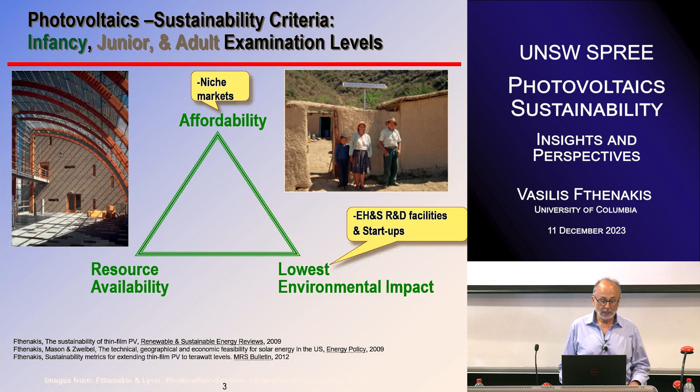The work started at Brookhaven National Lab in the mid-80s, and under the auspice of the Department of Energy, we were looking to help, for the most part, environmental health and safety in startups and laboratories. So to help them to maintain safe facilities, safe labs, safe startups. And the cost issue was not really a major one, because the markets were niche markets. We were taking off-the-grid small systems in developing countries, and some architectural designs, statement type of designs like the ECN in the Netherlands.

Following up in perhaps 1998 to 2005, I call it a junior stage, when big markets started with incentives, subsidies in Japan, then in Germany with RPS, early 2000, then the big and profitable markets started, and the cost issue had to do with competition in peak shaving markets. And as you know, peak electricity is more expensive than base electricity. So photovoltaics didn't have to get to very, very low prices to be competitive for peak shaving markets.

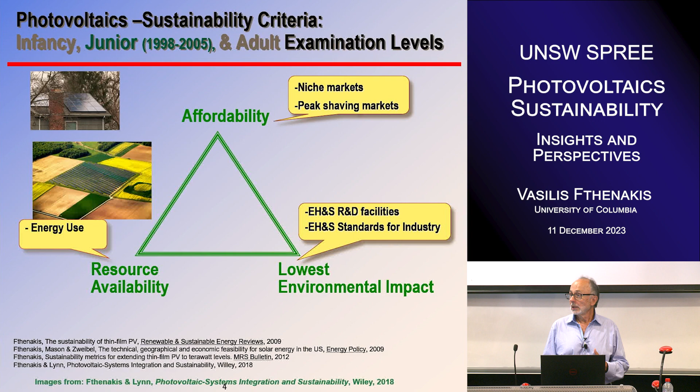For environmental impact, we were working with others and organizations, the DOE and NSF and so on, to develop standards for the industry, how to maintain environmentally friendly facilities. And then we reached what I call the adult stage, where we are now. It's the longest stage, where the affordability issue became affordability in a competitive world. Prices that are lower than the prices of electricity from coal, natural gas, and nuclear, and so on.

The life cycle impacts included investigations of the potential impact of big solar farms on the ground. And material availability became a real issue. Because for some technologies, you have minor elements from the production of base elements, like tellurium from the production of copper, indium from the production of zinc, and you have silver and so on. And those are finite resources with relatively low production in those years.

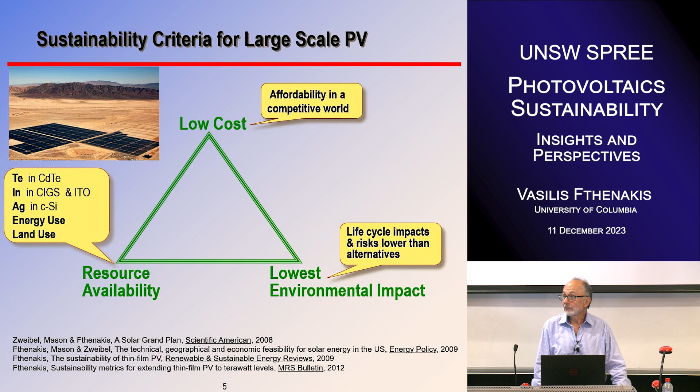Also, we started looking more intensely at energy use, to answer questions about energy return on energy investment, and land use. Now, the cost issue has actually been addressed.

As you know, solar electricity, at least from utility-size plants, is the least expensive electricity now. Solar and wind. In the United States, for new plants, solar plants are actually the least expensive ones, starting from 2021 even less expensive than wind for any new plants.

And they priced down now to about $35 per megawatt hour. That is almost as low as the price of electricity from fully depreciated nuclear and coal power plants, and a lot cheaper than new plants with any fossil and nuclear. So the cost issue has been addressed already.

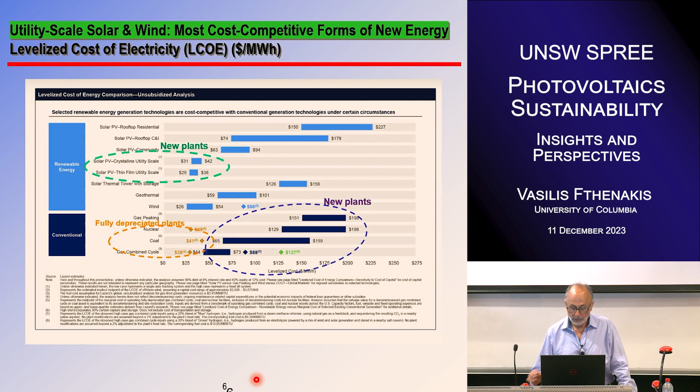Now, what about other issues that have to do with resources and environmental impact? There are questions there. Some actually reflect real issues. A lot reflect perceptions, like photovoltaic power plants can pollute the environment. That PV growth is constrained by material availability, that's a real issue. I'm going to discuss that.

Energy return on energy investment is too low. That's a perception for some; it's not an issue. That PV deployment uses too much land, again, a perception, depending on how you look at it. And that photovoltaic power plants create a heat island effect, a real issue that we investigated. So let's start with some of the perceptions, perhaps.

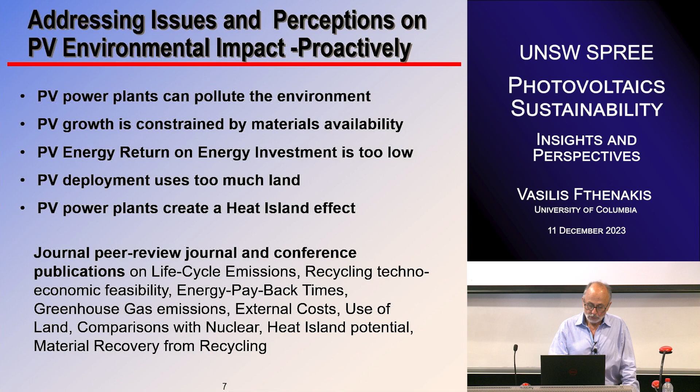Over the years, we developed a bibliography with many journal publications, conference presentations and publications, and magazine publications, trying to proactively answer all these questions. So we took the extra step, as scientists should do, to disseminate as effectively and as broadly as we could the results of our research. High impact journals, but also magazines and even newspapers, and a lot of interviews those years.

Actually, I think a leading study that combined the three metrics, the resources and impact and cost, was published in Scientific American in 2008 and was translated into 8 languages. So everything has been fine. And now currently, photovoltaics, as we know, lead the energy transition. It's the least expensive new energy generation, at least in some areas.

But still, there is a debate. You couldn't imagine that. What you see here is an article that was published late in 2021 in Energies, where the authors Seibert and Rees contested the inherent nature of photovoltaics as being renewable. I don't know if you can read some of these words. They call solar so-called renewable energy. The espoused technologies are not renewable, they were claiming.

From mining to installation is fossil energy intensive. Producing them, particularly mining their metals and discarding their waste, entails egregious social injustices and significant ecological degradation. And they had about 70 citations, most irrelevant, but they also cited a few anti-solar articles in the literature. Now, this obviously was erroneous, and we had to address it.

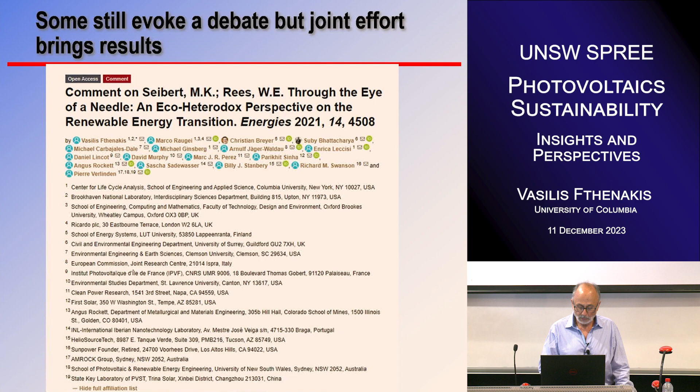Now, this quick and dynamic response had lasting effects. The editor-in-chief apologized for accepting the original manuscript in the first place, and I think we had some lasting effects because they put some additional safeguards in the peer review. Essentially, we chastised the journal for having inadequate peer review, and they admitted it, and they put safeguards there.

Now, some real problems and real solutions. Supply for minor elements like tellurium, indium, germanium, gallium, silver. We feel that there are different solutions. For tellurium, for example, the supply can increase. I will give you a few highlights of what I believe is the case there.

For indium and silver, the demand can be reduced. I don't think the supply can increase a lot there because there are very mature production markets there. And as you know, silver can also be displaced with copper and aluminum. So let me give you highlights of the stories.

We don't know much about tellurium production. We don't know exactly what tellurium production is today. I think it's between 600 and 800 metric tons per year. But we know a lot about copper production. Copper has been followed for many years, and we know that there's about a 3% increase in the primary production of copper over the years, with a little break during the COVID years.

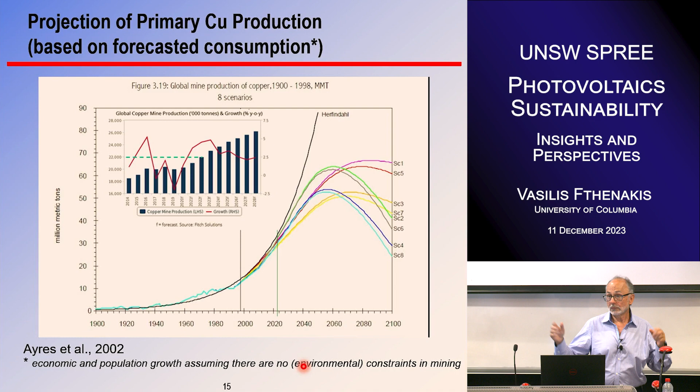Now, tellurium is a byproduct of copper production. Most of what we have now in the market is from copper sulfide ores, a byproduct of copper production. So we feel that it's going to follow the same trend, really. So let's see how it's produced in copper circuits. Down here it is produced as a byproduct from the refining of copper with anode slimes. So we get about 50% of the tellurium that is in those slimes. So from 100 tons in the slimes, we get about 50.

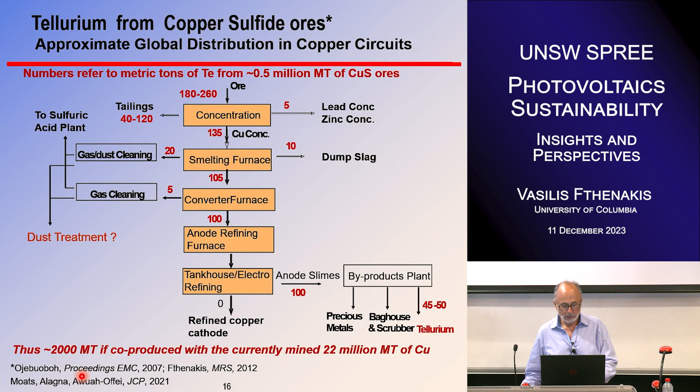We have other losses in the air pollution control equipment that could perhaps be recovered and so on. But even without this additional recovery, with 50% recovery at the end, if all the production of copper co-produces tellurium, we can have 2,000 metric tons. But maybe less than half of this can do that, because copper oxide does not really include the tellurium, copper sulfide does. But anyway, I think that now we are about 600 to 800 metric tons.

And again, following the scenarios of copper production that I showed before, we expect a peak at about 2060, 2070. I have bracketed this in low and high, depending on the scenarios and also on assumptions about increased recovery from anode slimes. Selenium is recovered by about 80%, and gold and platinum about 95 to 98%. So the 45 to 50% recovery rate could increase. But anyway, we're going to have a peak at this point unless we recycle.

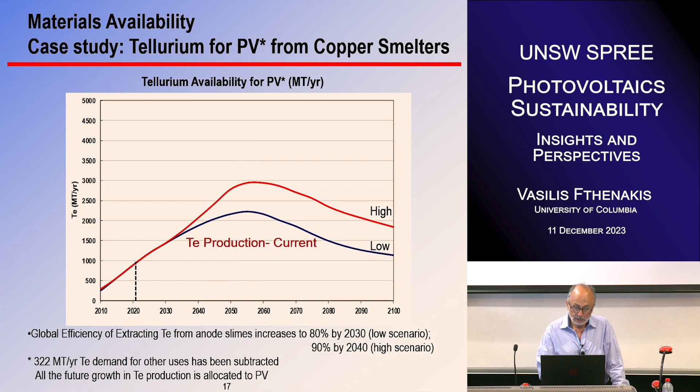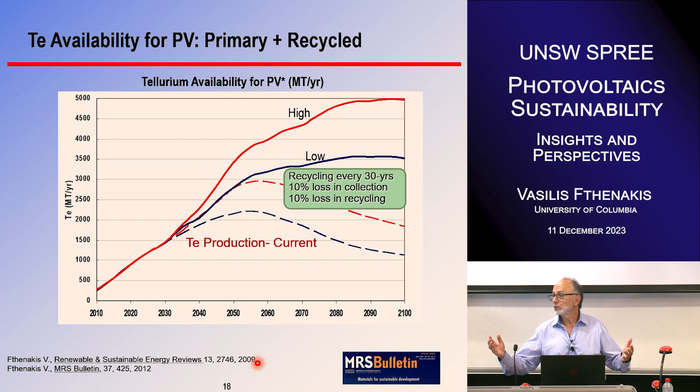With recycling, you can have a very important secondary resource of tellurium in this case. And it is proven, you can recover it. There is technology. A major company in this production for solar recycles their scrap and so on, and you can have 95% recovery of tellurium there at commercial scales. So then the peak is shifted to the next century. By then we may have fusion, or so many other technologies that we don't need tellurium any longer.

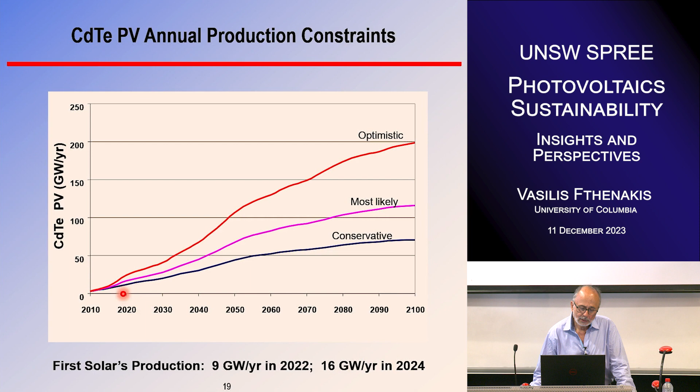With these primary and secondary resources giving perhaps a high ceiling on the production of cadmium telluride, we can make these projections. Again, optimistic, most likely, conservative, corresponding to different efficiency and film thickness assumptions according to different scenarios of production. I think the only big company in the world that produces cadmium telluride is close to 16 gigawatts now, with new production of about 7 gigawatts in India. So we're along the conservative one, but not far from what we projected about 10 years ago.

Now, the value of recycling becomes apparent here, because with recycling you have a secondary resource of tellurium. The same applies to other elements from other products, indium, germanium and so on. You increase the availability and the potential of these technologies, and a secondary resource also relieves the pressure on prices. It addresses the cost, and it avoids disposal in landfills. So it improves the environmental impact. And you also save energy in addition to saving materials, which also reduces the environmental impact.

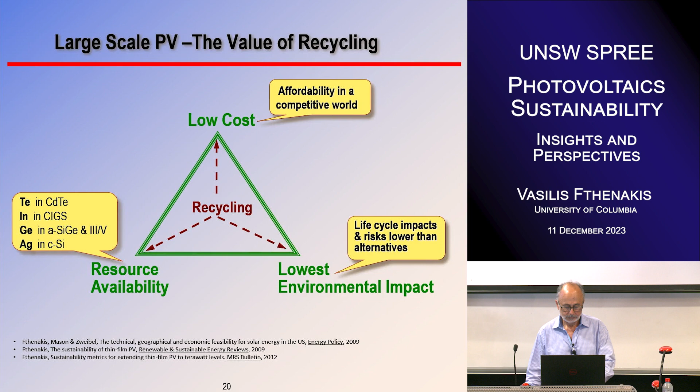Okay, so recycling technology, again, it is developed. You can see here a schematic of technology we developed at Brookhaven National Lab several years ago, starting with module fragments in the hydrometallurgical operation, using something inexpensive, dilute sulfuric acid, in this case only about 0.5 to 0.7 molar, and peroxide. Then we leach the metals and the semiconductor elements.

We leave glass that we still need to make cleaner to get it back into float glass. And this is a project actually that I'm working on now. We started working with Pablo Dias companies from UNSW, who actually originated the technology, to have clean glass going back into float glass or rolled glass for silicon modules.

But here the leachate that includes the metals and semiconductor goes through a series of ion exchange columns. The first will retain copper, the second will retain cadmium. At the end you have a leachate rich in tellurium, which precipitates as tellurium dioxide. You rinse the ion exchange columns and you get copper from the first, cadmium from the second.

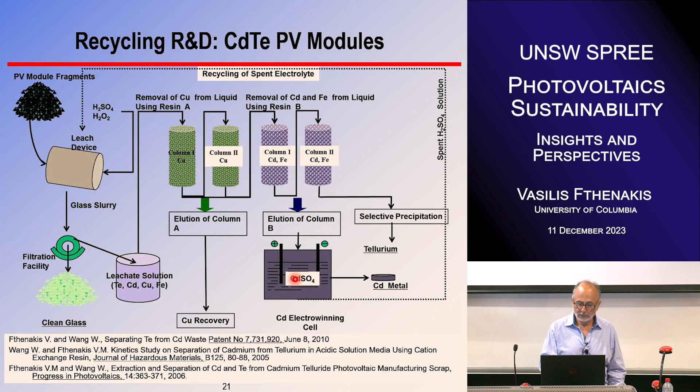You have to go through purification if it's not really six nines, and the formation of cadmium telluride. We actually found years back that this could be done at 1 cent per watt. Today it could be even less because you have more watts per module.

Now, the indium story is a little different. It's actually substantially different. One, the supply is already mature. We don't expect to have any new sources or any higher material recovery in indium. And two, there is a lot of competition on indium from thin film displays and all of this, even the small cell phones and so on. There is a lot of competition.

The CIGS technology cannot go away from indium. If you use indium in ITO, you could substitute indium tin oxide with fluorine tin oxide, for example. But for CIGS, they are actually stuck with indium. So we have some numbers here from a thin film partnership. The current production is about 900 metric tons per year, and they think that you can use 35%

of that. And in current production in solar, First Solar, actually Frontier, uses 2 micron CIGS, and that corresponds to about 15.5 metric tons per gigawatt if you don't have big losses. But if they can produce only half a micron, about 400 to 500 nanometer layers, obviously you can get a lot more production for the same amount, like 80 to 100 gigawatts per year.

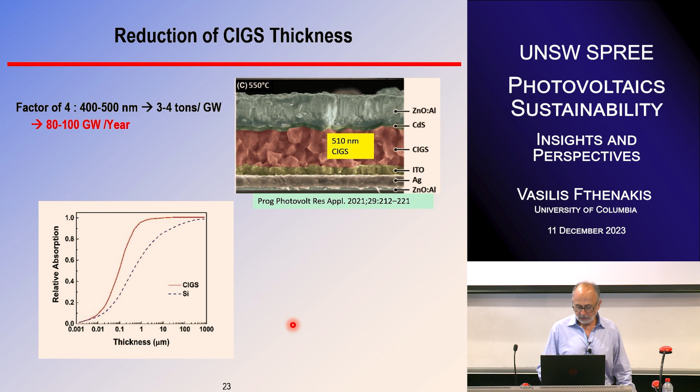And actually, the optical efficiency of this material is very high. So you can get down to a fraction of a micron, and it has been done in the lab. So this is how the industry is looking at the supply and the demand, to get into thinner layers. And also in the lab there are prototypes that use less indium and less silver

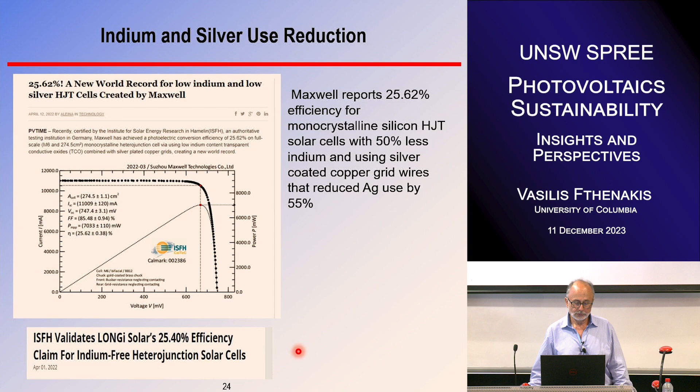together. So for example, Maxwell reported 25.6% efficiency for monocrystalline heterojunction, using 50% less indium than the conventional technology, and using a lot less silver by just having copper grid wires that reduce silver. Also, Longi has produced, at least in the lab, this type of cells that use almost no indium.

Now, silver. We're talking about replacement because, again, silver is very expensive and is limited, and I think already the market uses about 20% of the silver production. So there is a lot of R&D on replacing silver with aluminum or copper. As you know, you have an issue with the contacts there, whether they stick so well and so on.

But there is a lot of research going on, and even an Australian startup like SunDrive broadcasted that they can go completely silver-free in silicon heterojunction, probably by using copper and aluminum. And Georgia Tech, Ajeet Rohatgi, for example, whom Martin knows very well, is actually trying to do this now, a project from SETO and others as well.

But until it's replaced, silver can and should be recycled. Because with the current vintage of crystalline silicon, the silver recovery gives the highest revenue. So if you don't have silver, then you have a catch-22 situation. If you don't have silver, then recycling becomes more problematic because you don't have the value from silver.

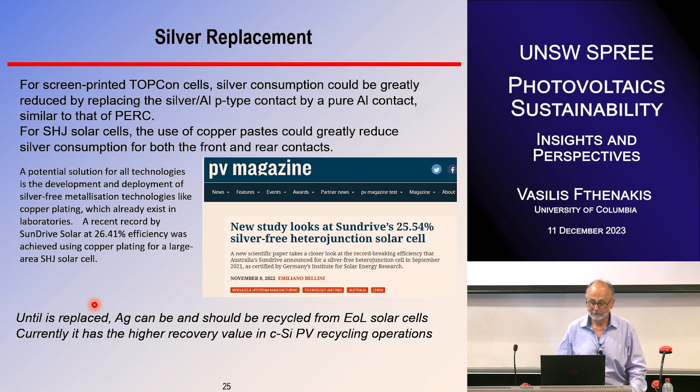Okay, now with resource availability, we're talking about not only materials but land, for example, and I wanted to show this time after time because it's a myth that photovoltaics use a lot of land. Yes, they do for the deployment or for the plant, but if you look at the whole life cycle and include the land for mining, coal uses more land in the United States than solar. Because of surface mining, that takes a lot of land. About 75% of coal in the US is from surface mining.

And this comparison is based on only 12% efficient solar cells. With 20% efficient photovoltaics, these numbers are obviously much lower compared to the land use of coal. And the numbers for coal are based on a lot of historical data, actual numbers, not projections. Historical data: we know the mines, how long they lasted, what they produced, and so on.

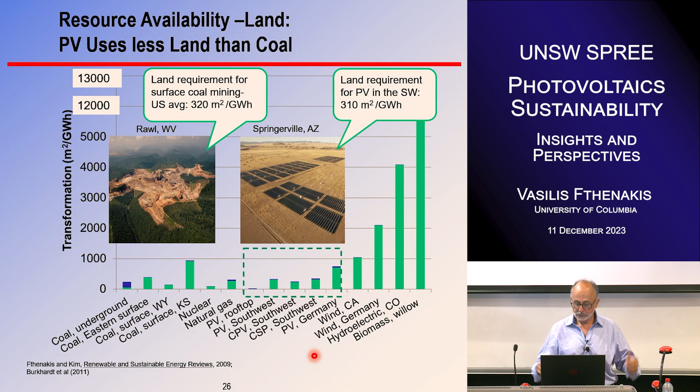Environmentally friendly. It does not really alter the land, okay? And it can also be dual use. There could be, with big solar farms, an impact on the ecosystem, but the industry is doing its best to avoid this. I worked with SunPower, crystalline silicon, actually a leader in efficiency, and First Solar on cadmium telluride. For big solar farms, we're talking about 550 megawatt, and the 750 the big one for SunPower. They work to avoid sensitive areas, minimize impact on the ground, and maintain and improve vegetation.

And a lot of biodiversity studies in the Southwest, in the Mojave, in the Sonora Desert, and we know more on biodiversity of different species now from these studies than before the solar farms were constructed there.

Heat island effect, yes, I have 20% photon to electron conversion efficiency, 80% is heat. It increases the temperature locally, and we did detailed CFD studies using data with actual temperature measurements on the modules, on the ground, above the ground, from an 80 megawatt photovoltaic plant in Ontario, Canada. And we saw that this temperature increase dissipates with elevation and distance,

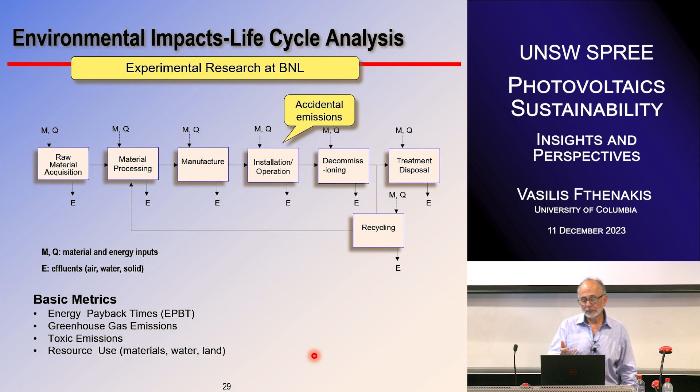So there are a lot of data in databases about the environmental impact of copper, aluminum, glass, different metals, silicon, typically for normal operation, but we didn't have data for potential accidental events. And in the case of cadmium telluride, because cadmium is toxic, there was high interest in looking into what could be the emissions if you have fires that engulf cadmium telluride photovoltaics.

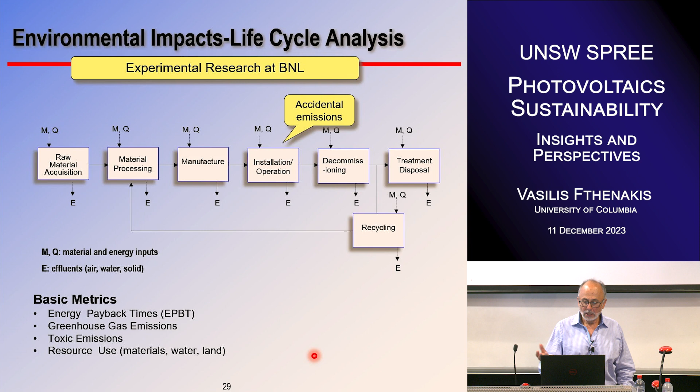So to answer this, we had modules from the company, and they were cut into pieces, and we were heating them according to protocols by the American Society of Testing Materials for testing materials like clothing under fire, up to 4 hours to about 1100 degrees Celsius. So we cover all the flame temperature range that you expect in residential fires.

And we used different types of analysis, from thermogravimetric analysis, and we had scrubbers, 2 scrubbers in series, nitric acid, to make sure that the second scrubber has zero elements there, so that the first one captures everything.

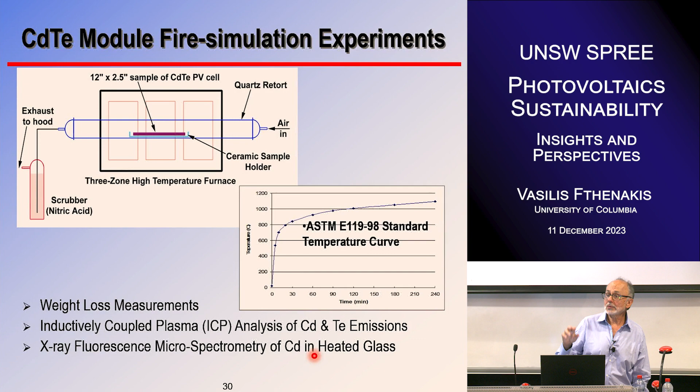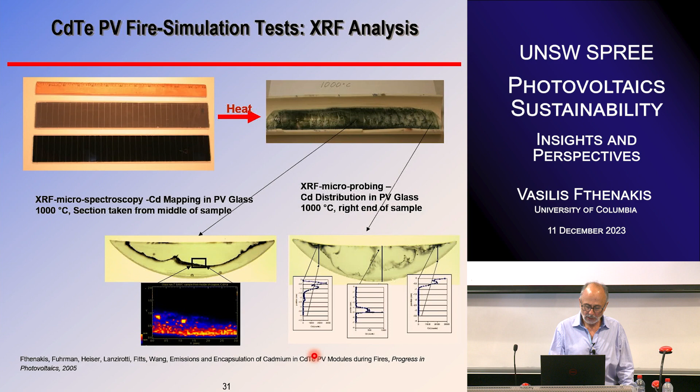For analyzing cadmium and tellurium emissions, and X-ray fluorescence microspectroscopy using the X-ray big machine at Brookhaven National Lab. And what we saw there is that actually we have a small loss of cadmium, as was quantified with the scrubber and the ICP analysis of the scrubber liquids. What we see is that actually this happened before the glasses fused together.

So what you can see here is a cross-section of the module, talking about 3.2 millimeters of glass at the top, 3 at the bottom, and in the center you have everything else. So it's the EVA, is the thicker layer there, and you have the metals, and you have the cadmium telluride, the cadmium sulfide layers here in the center.

And the fluorescent analysis, as you know, actually is a photon that activates, ionizes the atom, and then you have the hole that dissipates at a certain intensity and certain energy wavelength. And actually cadmium emits at about, I think, 23 kiloelectronvolts. So you have the signature of what is emitted of the atom that decays from the ionized stage, and the intensity of this peak gives concentration.

So here is actually about 45,000 counts. This is a concentration, and this is the signature of cadmium here in the center. This is zirconium, that's actually an element in glass. So this is before it's heated. Now, when it's heated, this is 760 degrees Celsius. It is above the softening point, but below the melting point. So you can see that the glass took the shape of the semi-cylindrical container.

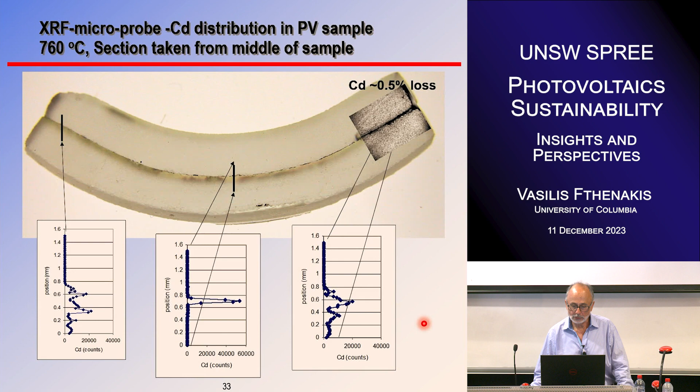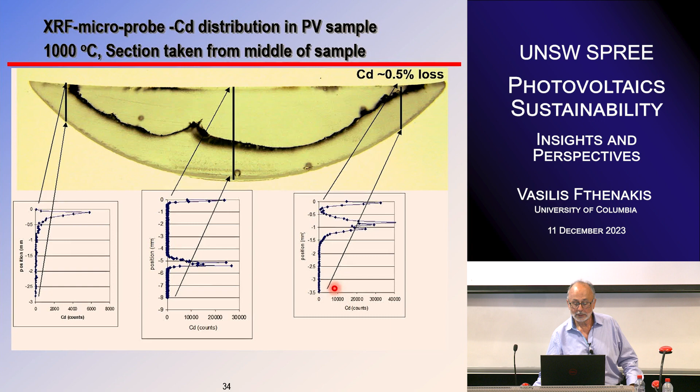And we have the same. The ICP analysis shows no higher losses of cadmium when we get to 1,000 degrees. Still we see the signature there, cadmium is there. Not higher when we get to even 1,100. Not more than 0.5%, 0.5% plus or minus 0.05 in all those. So it's obvious that the only mechanism for the cadmium to come out is before the two glasses fuse together.

And this has real impact. And we guide the industry not to change that. At some point, the company wanted to consider replacing the back glass with cheaper Tedlar, cheaper polymeric materials. We advised them very strongly against doing that because then cadmium won't be sequestered.

So for all the emissions in the life cycle, you have most of the emissions of cadmium during purification and production of cadmium telluride. All of those, normalized per gigawatt hour of production, and this corresponds, I think, to about 12% efficient; now we have 18.3% efficient, so the numbers are better. There are only 0.02 grams per gigawatt hour, and these emissions are 100 to 360, now even more, lower than those from the best equipment in United States coal power plants, which are all equipped either with electrostatic precipitators or baghouses at cadmium removal efficiency of about 98.8%.

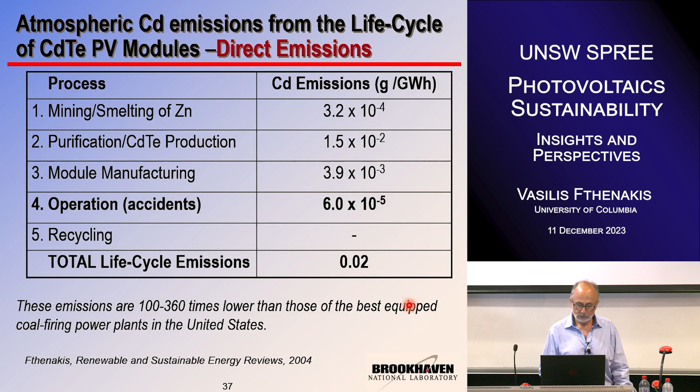So that 1.2% that passes through in normal conditions from the coal power plants is at least 400 times, now more than that, higher than the direct emissions of cadmium from cadmium telluride. So when you replace coal, obviously it's great.

Now, energy payback times. As you know, energy payback is the time, typically in years, in which the operating plant produces all the energy that has been consumed in its life, or is going to be consumed at the end of the life, while it's still operating. You can see numbers there go down drastically because early on we had very low efficiency modules, very thick layers, and a lot perhaps of cement and metals in the foundations.

And now numbers for all technologies, depending on the solar irradiation, that's the biggest factor there, can go down to half a year under the very sunny areas, like 2400, the best areas in the southwest, the best areas in Australia perhaps. In Chile, up in Atacama, it could be even less than that.

But what intrigued us and made us go into this area about 10 years ago is that we saw a great divergence in the literature. A lot of studies were showing all kinds of results. We noted that there is divergence because people were using old data: 2000 or 2005 publications were using 1990 data, because there were some data from German systems that were very well broadcast in those years, very detailed, and obviously they didn't reflect or represent the current technologies. There were also inconsistencies in methodology and treatment of intermittency.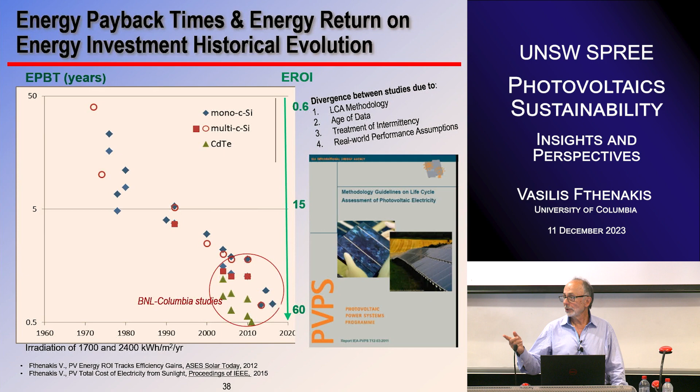Some studies were assuming that you have 1-to-1 kilowatt-hour to kilowatt-hour use of batteries and so on. So we put together Task 12 under the auspices of the International Energy Agency that is still producing very good reports, and in those reports we settled this issue by giving very concrete guidelines on the assumptions to be used and not to be used, what performance ratio to use, what should be included and not included, and we also produce the reports with the LCA data. And this task is going well with the co-management from UNSW and NREL now.

Now, the evolution continues with established technologies. You can see here over the 5 years, from 2015 to 2020, a big reduction in the energy payback times of crystalline silicon. Why? For the most part, it is the reduction of the thickness and the reduction of the kerf loss, because the industry transitioned to diamond cutting from multi-wire slurry cutting, and instead of having with every cut 145 micron loss, now we have 65 micron losses. Thinner wafers, 170 versus 200, and also higher efficiency, 17% to 20.5%. About 25% better in multicrystalline, but 45%, the most impressive, is with Czochralski silicon, which is a very high demand type of silicon.

As you can see here, the Czochralski silicon and the wafer from Czochralski are those two colors, the dark brown and the yellow, and you can see that in 2020 they have been reduced a lot, again because of the kerf loss reduction, thickness reduction, wafer reduction, and the improvement of the efficiency. And you have some reductions in multicrystalline as well.

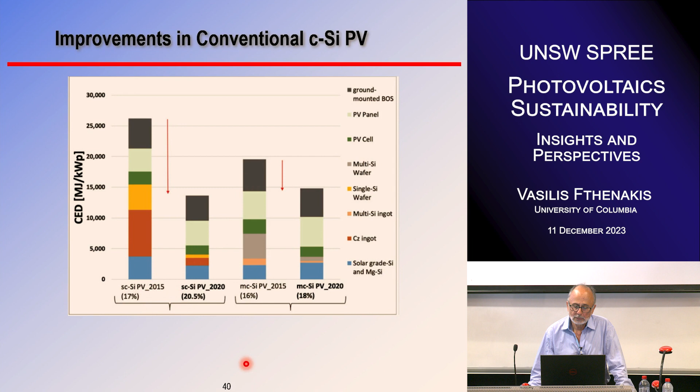Now, with new technologies like perovskites, the situation can be even better, because perovskites, especially with solution-based feedstocks, don't use a lot of energy. You can see here a summary picture. I'm going to show a few more details because I know several people are interested in perovskites and are doing perovskite research. The top segment of those bars is the balance of system, so the inverter, transformer, cables, mounting and support system, and the bottom one is the panel. You can see perovskites here. There are 4 perovskite single junction and 3 perovskite tandem. They are better because they use less energy per kilowatt peak than the conventional ones, silicon or thin films.

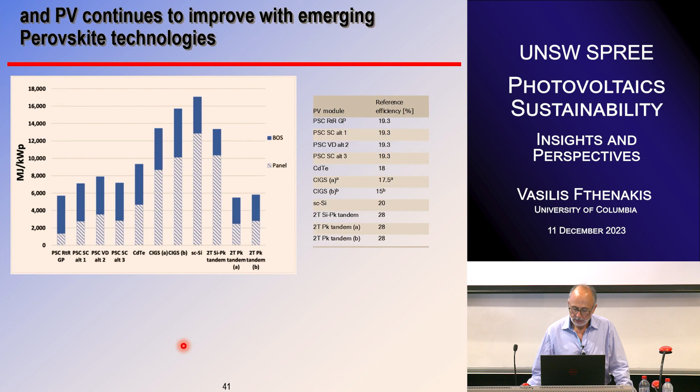Now, this is a little busy, but I wanted to give you an idea of the technologies that we use. We use technologies that, 2 years back, were representing the highest efficiencies in perovskite in the lab. Most of the studies consider FTO, fluorine tin oxide, instead of indium tin oxide, because they recognize that there is an issue with indium. So although it's a thicker layer for the transparent top conductor, they use FTO instead of ITO because of concern about the indium. With tandem, we have mixed cation here, formamidinium and cesium. That is what we use. Those were at that point the record tandems from NREL and Colorado groups.

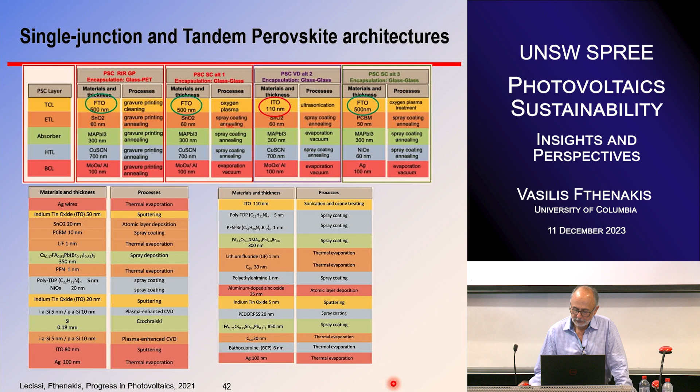Perhaps it's too much detail, I'm going to go a little faster, but what we see here is that what differentiates between different technologies is electricity consumption. For example, a very fast production using roll-to-roll gravure printing, implemented by Energy Materials using systems that had been used in photo-sensitive film printing by Kodak. They're using the same machines, altered for perovskites. Very fast throughput. It has the lowest electricity demand, about 75 kilowatt hours per square meter.

The ones that are based on spray coating use more, because they are slower. But again, there is a caveat: the spray coating numbers are based on our scaling up of lab measurements by assuming different energy use factors.

Having data on equipment and the times it takes in processing, so they are not real commercial data. These are commercial data here. So maybe the situation with spray coating can become better, we don't know. Also, what we see here though is that in tandem, the biggest energy use is on the silicon that is underneath, not on the perovskite. So that's the biggest one.

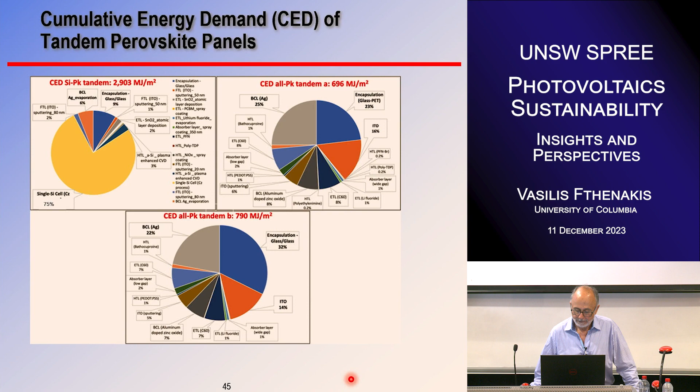Now, all of this, the comparison so far assumes perhaps the same longevity, the same life expectancy. But as you know, perovskites are not really tested for very long lives yet. I mean, we're talking about less than a year actually in lab studies. So here we run energy payback or energy return on energy investment for different lives, 10, 20, and 30 years, and compare the 4 thin film perovskite and the 3 tandem with the conventional ones.

And what we see for different grids, the current fossil fuel dominated grid and also a grid that will be mostly renewable energy, where you replace electricity with electricity. For a fossil fuel dominated grid, you actually replace primary energy with electricity, so you have higher benefits there because, again, electricity is a higher quality of energy.

So here, I draw a line that is at the level of silicon, 30 year, and you can see that single junction perovskites between 10 and 20 years could give you perhaps the same energy return on energy investment. The actual number is about 12 years. So if they last at least 12 years, they can give you the same energy return on energy investment, based on this data, as crystalline silicon that lasts 30 years.

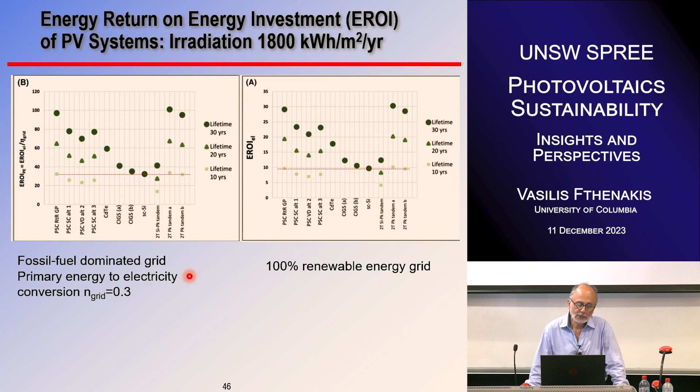Now, what else we should look at when we're talking about perovskite, especially the lead halide perovskites, and all the industry records that I showed before on single junction. They're based on methylammonium lead iodide. And you know that it has lead, okay? So with lead, actually, there is an issue because lead is toxic.

I think nobody has actually done fire testing of perovskites to see if lead is going to be retained there or not. Obviously, it depends a lot on encapsulation, but we don't have products to test. And the amount of lead actually is relatively low, maybe about 0.4 grams per square meter, versus cadmium in cadmium telluride, about 5 grams, and lead in lead solder in crystalline silicon is a little more than that.

So it's a small amount, but nevertheless, the methylammonium lead iodide, when it degrades, gives cations, MAI perhaps, and also lead iodide. Lead iodide is very, very soluble. We're talking about many orders of magnitude more soluble than lead from solder or cadmium from cadmium telluride. Many orders of magnitude more soluble. So there is an issue there.

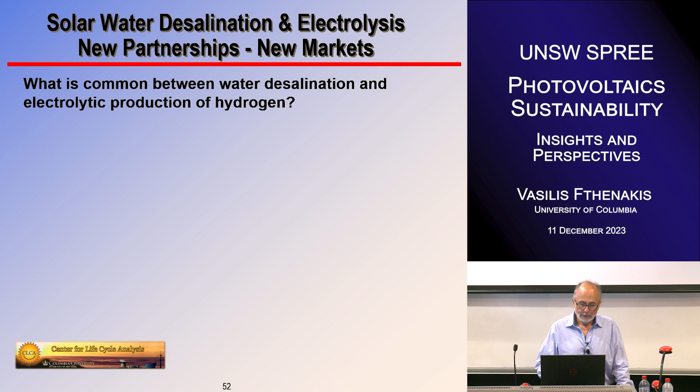So we started really looking into water as well. For years, we were looking just at energy and the environment. We started including water in my center's spectrum of investigations about 5-6 years ago, and we looked into different solutions. But before going to the solutions, let me highlight what is common between water desalination and production of hydrogen, because a lot of hydrogen production with electrolysis is now catalyzed by affordable solar energy, right? We have a lot of solar energy there.

Both technologies, when they're using fossil fuel, produce a lot of carbon dioxide, and the cost of producing water and the cost of producing hydrogen from electrolysis is very dependent on the cost of energy. About 40 to 60% of the cost of producing water or hydrogen is the cost of energy. So what we have been doing at Columbia is looking into flexible designs and dynamic operation of both desalination and hydrogen electrolysis plants, so that they can handle some of the variability of solar.

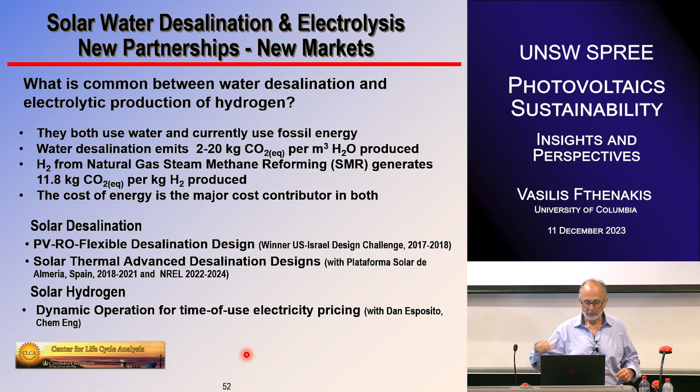Also, we looked into inexpensive solar thermal designs that could use waste heat in addition to solar thermal, but I don't think I have time to talk about this, so I'm just going to give you two highlights. One on flexible desalination design that uses the most established desalination technology, reverse osmosis, and the most established and cheaper solar energy, photovoltaics, and also solar hydrogen. We'll talk a little about photovoltaics powering electrolysis, but also the potential use of solar thermal and waste thermal in desalination. Just a few highlights.

So a concept that we developed and implemented with all the mechanical parameters, which took a prize in the competition between the US and Israel on solar-based desalination, is what we called active salinity control reverse osmosis, where we use different salinity levels of water. So low salinity wastewater or brackish water, combined with high salinity seawater or industrial oil and gas water, with different pretreatment, in two different reservoirs, mixing them in a manner that follows the availability of energy. So when you have a lot of energy in the middle of the day, we're using more seawater.

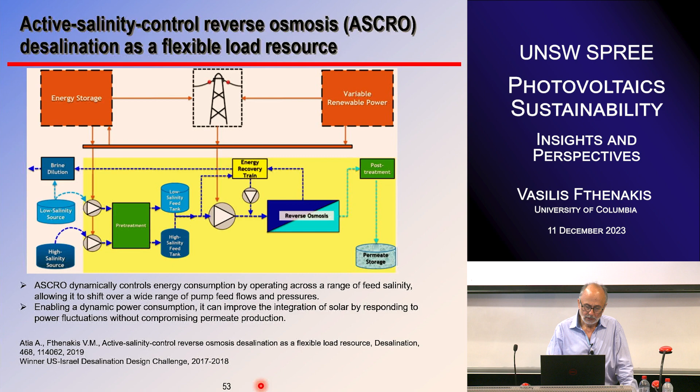When you have less energy, when you have clouds and so on, or early during the day, or some hours at night when we also have energy storage, you use more of the low salinity water. And in those scenarios, the production of fresh water is maintained approximately the same, but you take advantage of the variability of salinity that follows the availability of energy and/or the prices of energy.

Now, with water electrolysis, about the same story. There are two basic commercial electrolyzer technologies, alkaline and PEM. PEM is the proton exchange membrane technology. It's more flexible. It's typically operated at 1.7 amperes per square centimeter, and it has a Faraday efficiency of about 85%, but it could take higher current densities.

Higher current density means more electrons and more hydrogen coming out, but at a penalty of efficiency. Okay, so the efficiency can be reduced. If, for example, you get to 6 amperes per square centimeter, the efficiency will be down to only 62% from 85%. But you get more hydrogen.

So there are our studies, and what we see here corresponds to the actual pricing in the California ISO, half-hour prices during a whole 18 months. If you use those prices as a guide, when it's low solar, low electricity price, you put more electrons in there, higher current density, and the reverse if the prices are high. We found a sweet spot at about 3 amperes per square centimeter for California. That's the lowest levelized cost of hydrogen.

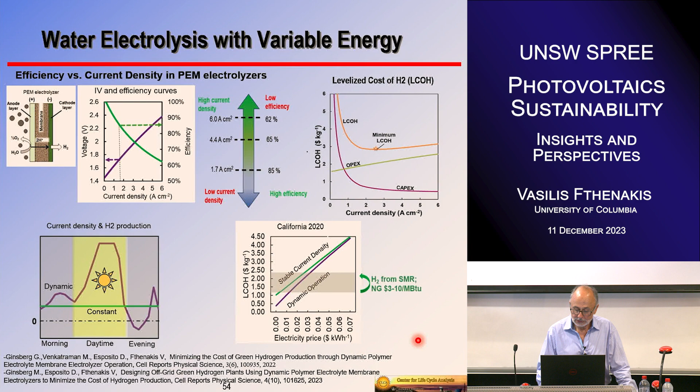Now, this doesn't come as a free lunch, because when you have higher densities, you can have more damage. You have more degradation. And we modeled that with certain assumptions in terms of degradation. You can see here some highlights of the mechanisms typical for degradation when you work at higher current density. You can have low conductive oxides, some membrane thinning, hot spots, oxygen gas bubbles, large localized pressures, and gas diffusion, and you can lose both hydrogen and oxygen, and you may create some risky conditions there.

People are looking into strategies like nanostructured conductive oxides that can reduce the iridium loadings, protective platinum coatings on bipolar plates, super hydrophilic surface treatment of titanium, the titanium element that prevents runaway voltages. There are some mitigation strategies, but those are not developed yet.

There are companies, though, at least one company that I know, Nel Hydrogen, that is Norway-based but also has a production facility in the US. They are trying to do that, and they say they have prototypes that work at high current density, but there is no commercial product out yet. So there will be some additional cost there, but based on the data we have, we feel that it's a good way to go.

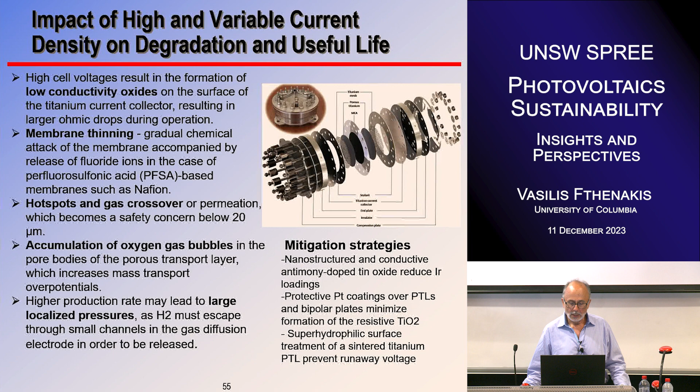But even now, without the new technology that can also use power electronics more suitable for high current densities, we can have dynamic operation of electrolyzers by using the current technologies in a modular fashion. The same way the big solar farms work now: they have a lot of inverters and a central control unit for all the inverters, and by operating some inverters at lower capacity, they can handle the variability. Those are called utility-friendly solar farms; they can operate at 10% less than total capacity, and they have headroom to increase the capacity when it's needed. And they can also provide ancillary services like frequency control and voltage control.

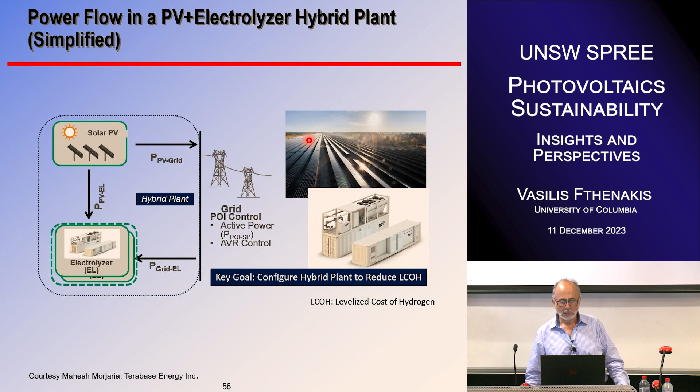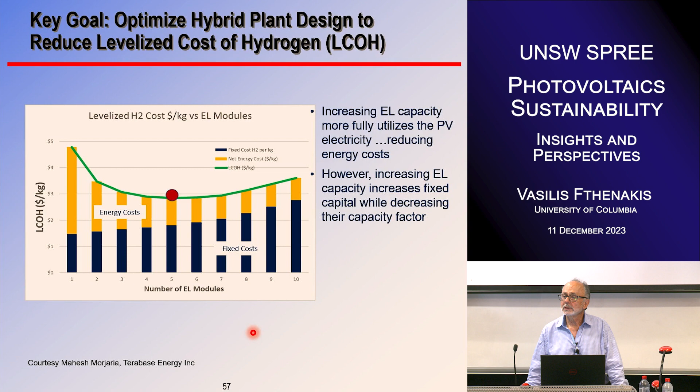The same way, modular operation of electrolyzers, because it's like batteries. You have many units, and you could keep some at partial capacity and others at full capacity, and you can take advantage of this. We know that projects developed in the United States for wind and solar follow this principle with the current technology, looking at different sizing scenarios depending on the prices and the resources. And they can be controlled with SCADA system architectures.

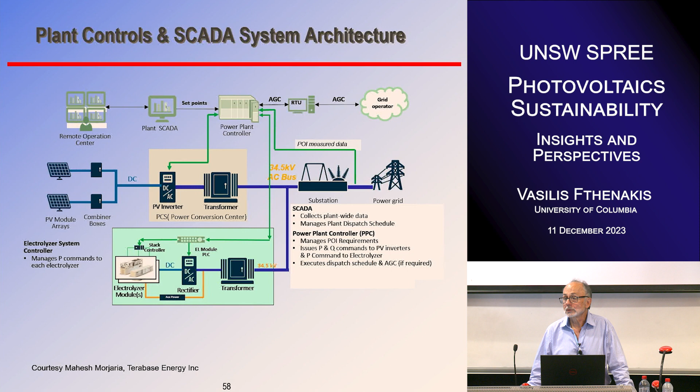Again, the typical control from a central unit that could control the individual inverters based on a signal from the utility, or in this case, from the demand. All the kinds of things that can happen with control devices in a power plant with many inverters, the same applies to a plant of electrolysis with many electrolyzers.

And also, and I discussed this with somebody this morning, I think a PhD student in Greg's group, there is a potential for using solar or waste heat for desalination to take advantage of the large heat release when you dynamically operate electrolyzers. When PEM electrolyzers operate at 1.7 amperes per square centimeter, they release about 7 kilowatt hours per kilo of hydrogen.

But when they operate at higher current density, they are less efficient, so they waste more heat. This heat is enough, we found with detailed simulations, to power a solar thermal type of desalination technology. Again, thermal technology, like low temperature multi-effect distillation, at a lower cost than reverse osmosis.

There is a lot more to show here, but my host is signing me that I should go into conclusions and leave time for Q&A. But I will be glad to give you a lot of details on each of these aspects; there are several papers on this. So I hope that I was convincing to you. You probably were convinced even before you heard this presentation.